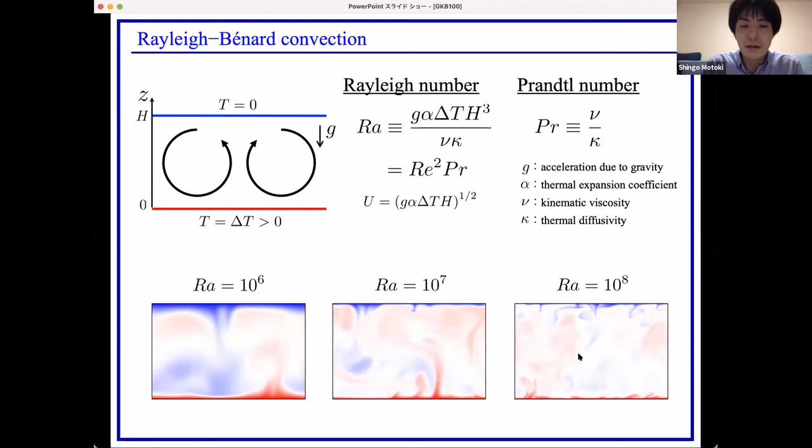Okay, and as Rayleigh number increases, the flow is more complicated, like this, and becomes a turbulent state eventually, representing the multi-scale flow and thermal structures. Okay, so the wall heat flux, corresponding to the total vertical heat flux from the bottom to the top walls, could be quantified by the Nusselt number. And one of the primary interests in the Rayleigh-Bénard problem is scaling laws of the Nusselt number with the Rayleigh number. And over half a century ago, two scaling laws have been predicted and discussed.

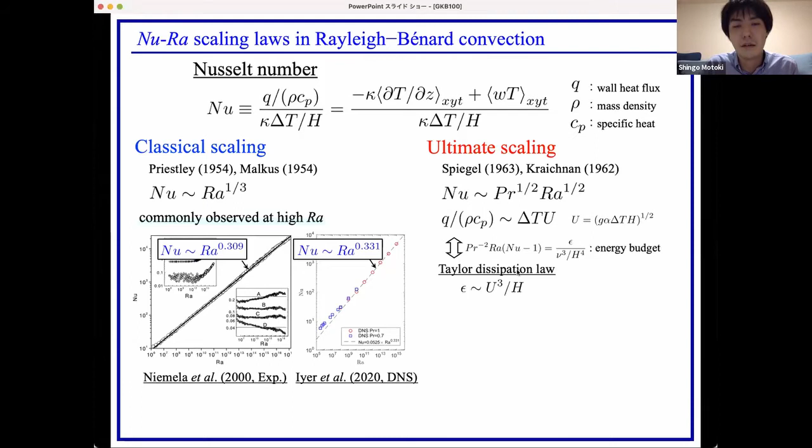One is the 1/3 power law, referred to as classical scaling, and the other is a 1/2 power law, currently called the ultimate scaling. The classical scalings have been commonly observed at high Rayleigh number in a lot of experiments and numerical simulations like this. On the other hand, the ultimate scaling means that the wall heat flux is independent of the thermal diffusivity like this. So this is related with Taylor's energy dissipation law via the energy budget of thermal convection. So Taylor's energy dissipation law implies that the energy dissipation rate is independent of the kinematic viscosity of the fluid.

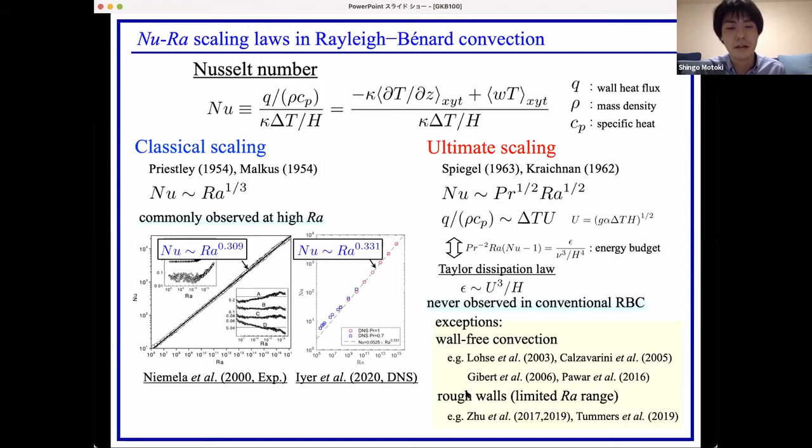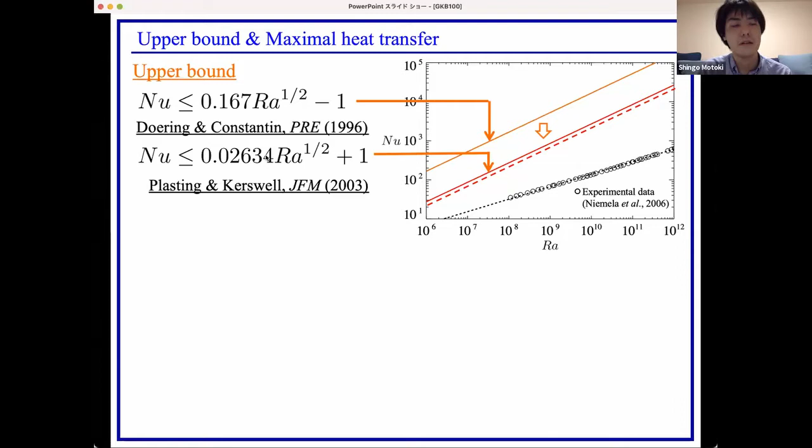But the ultimate scalings have never been observed in conventional Rayleigh-Bénard convection, except in, for instance, a wall-free convection or thermal convection between rough walls. Okay? For the Rayleigh-Bénard problem, the rigorous upper bounds have been derived by using a variational method. And Doering and Constantin first derived these upper bounds, and then the lowest asymptotic upper bound was obtained by Plasting and Kerswell. And these upper bounds exhibit the ultimate scaling like this.

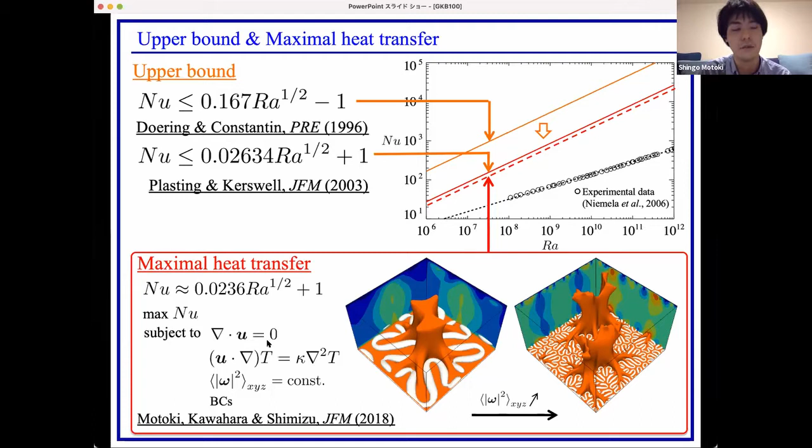On the other hand, we have recently found the optimal states maximizing the heat transfer under the constraint of the total enstrophy. And this optimal state also exhibits the ultimate scaling, and this ultimate scaling is quite close to the lowest upper bound here. However, the maximal heat transfer state does not satisfy the full Boussinesq equations, that is, the Navier-Stokes equation with buoyancy force. So these solutions require an additional body force other than the buoyancy force.

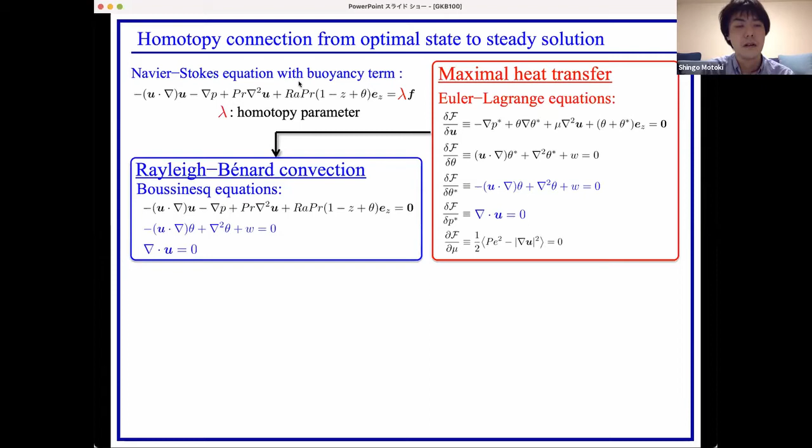Then we tried to connect these optimal solutions of the Euler-Lagrange equations for the maximal heat transfer problem to the steady solutions of the Boussinesq equations for the Rayleigh-Bénard problem using homotopy continuation from the body force to the buoyancy force. As you can see, the three-dimensional optimal states could be continuously connected to the three-dimensional steady solutions of the Boussinesq equations. This lambda equal to 0 represents the Boussinesq system here. And in this study, we focused on these three-dimensional steady solutions.

Okay, so we consider the solution to the Boussinesq equations with the following boundary conditions: no-slip, impermeable, and constant temperature difference between the walls, and horizontally periodic conditions. And we have tracked the three-dimensional steady solutions up to high Rayleigh number using a Newton-Krylov iteration.

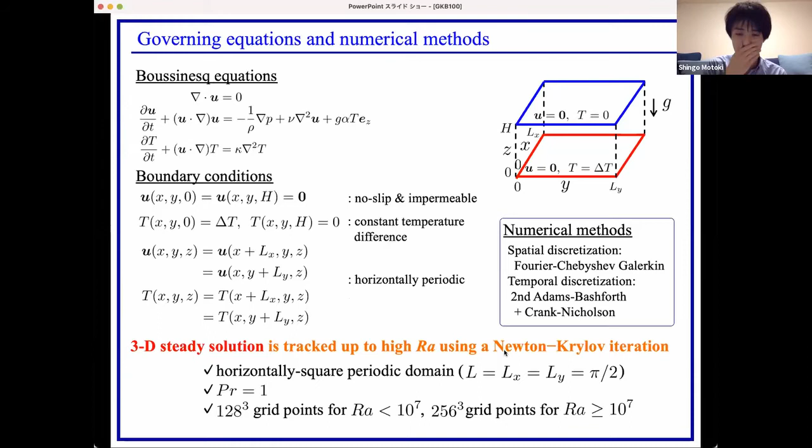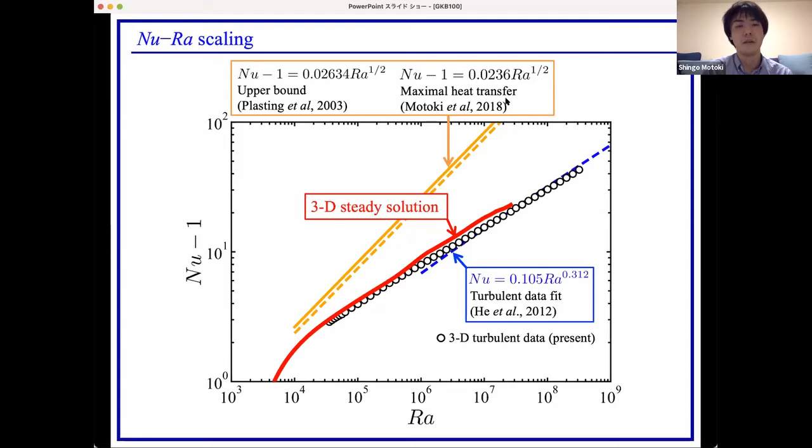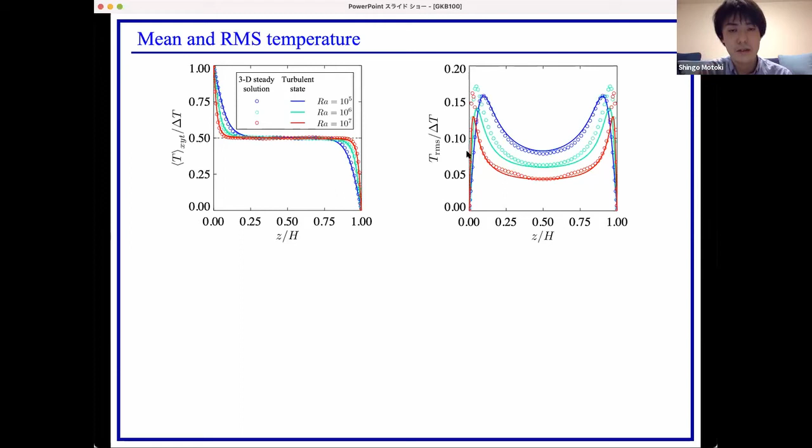Okay, so this is the mean temperature profiles and root mean square temperature in the three-dimensional steady solutions and turbulent state. The mean temperature profiles in the three-dimensional steady solutions follow that in the turbulent state well, like this. Furthermore, the corresponding RMS values are in good agreement with each other.

Okay, let's normalize the distance to the wall Z by the thermal conduction layer thickness delta. Near the wall, all normalized temperature profiles collapse onto a single curve. So the temperature difference exists only in the thermal conduction layer. On the other hand, the RMS temperature exhibits peaks at thickness delta.

Okay, so we consider the physical mechanisms of classical scaling. Here we assume that the Prandtl number is of order unity. In the near-wall regions corresponding to the thermal conduction layer, in the vertical component of the Navier-Stokes equations, advection, viscous and buoyancy terms can be comparable with each other. This balance determines the length scale and velocity scale as follows.

And this is the RMS vertical velocity normalized by this velocity scale. We can confirm the vertical velocity fluctuation scales with this velocity scale. So the definition of the thermal conduction layer thickness here and this length scale suggest the classical scaling.

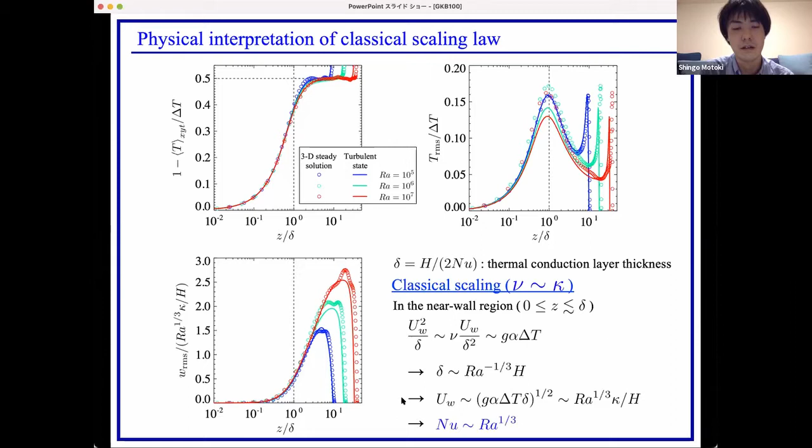Okay, so let's look into the spatial structure of thermal convection. These figures show the thermal and flow structures in the three-dimensional steady solution and the turbulent state at high Rayleigh number, 10 to the 7 here. The yellow objects represent the isosurface of temperature, representing the high temperature plumes. The gray objects represent the smallest scale vortex structures, visualized by the second invariant of the velocity gradient tensor.

Near the wall, we can observe sheet-like small-scale thermal plume structures with smallest scale vortex structures like this. These smallest scale structures are quite similar to those observed in the snapshot of the turbulent state. These small scale structures appear in the conduction layer, and the size of the thermal structures and the vortex structures scale with thickness delta in both the three-dimensional steady solutions and the turbulent state. So the three-dimensional steady solutions reproduce the near-wall convective coherent structures in the turbulent state.

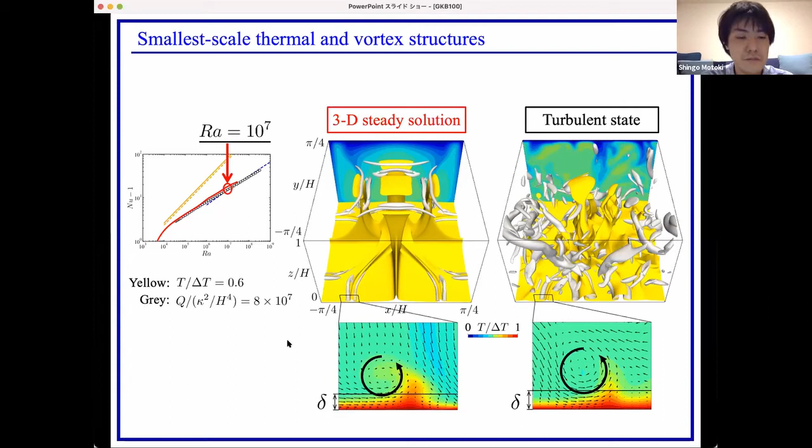But what then of the bulk flow? To examine the hierarchy of multi-scale vortices in the three-dimensional steady solutions, we apply coarse graining to the velocity field. The coarse-grained velocity U star is obtained by using a Gaussian low-pass filter, and here sigma represents the filter width. This method has recently been employed to capture the coherent structures of wall turbulence.

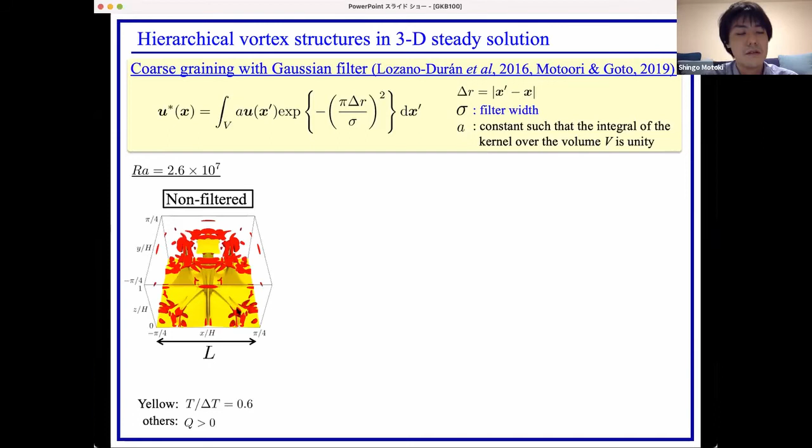So this is the non-filtered structures, and the red ones represent the smallest scale vortex structures. These blue objects represent the largest scale structures corresponding to the large scale circulation. These structures are visualized by the positive Q of the filtered velocity with sigma set to H. And for sigma set to L over 4, L over 8, L over 16 and L over 32, we can extract different scale vortical structures like this.

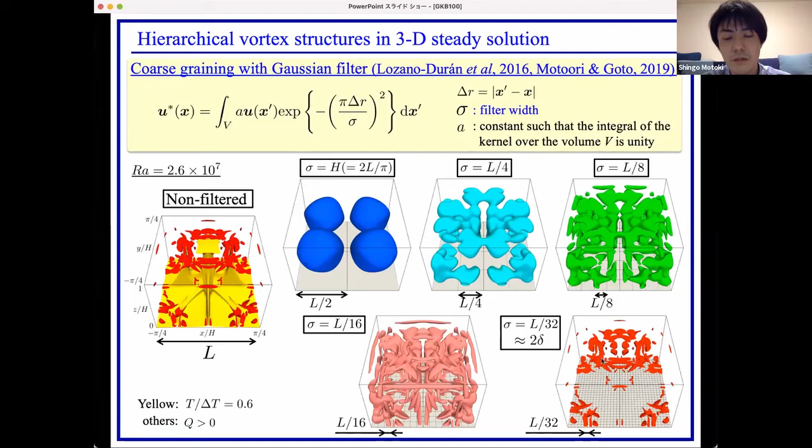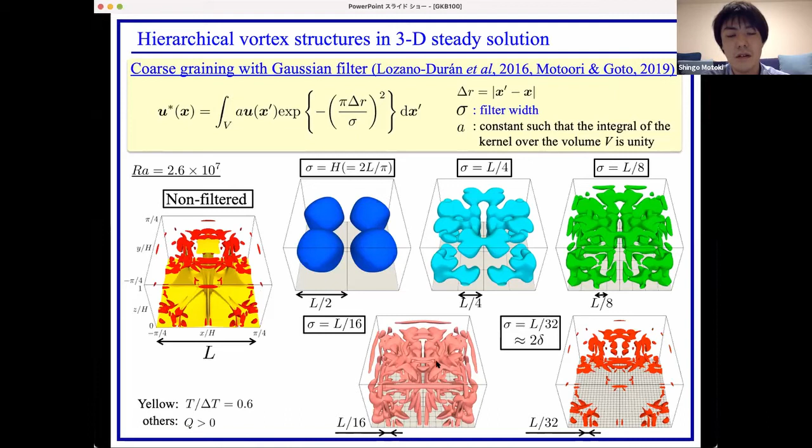The red structure represents the smallest scale structures, consistent with the non-filtered structure, and L over 32 corresponds to twice the thermal boundary layer thickness. The light blue objects and the green and the light red ones represent the intermediate scale structures, and we can observe these intermediate structures in the bulk region.

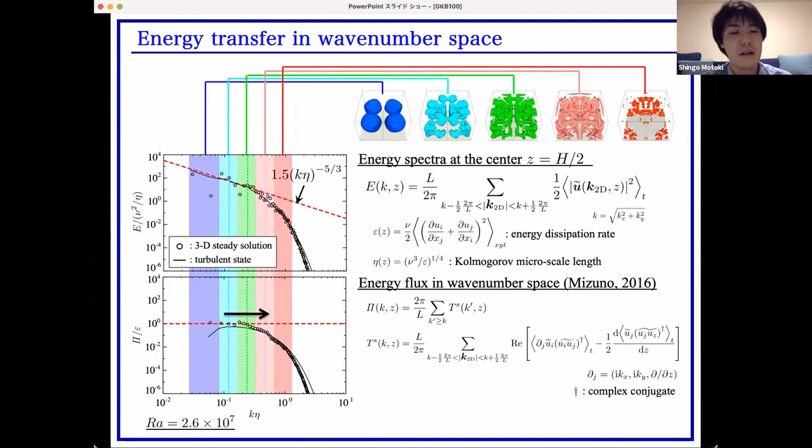Therefore, the three-dimensional steady-state solutions reproduce convective turbulence in the bulk region. Okay, let's get back to our original topic, that is, the scaling laws in thermal convection. So in short, in the conventional Rayleigh-Bénard configuration, that is, divergence-free velocity between isothermal, no-slip, impermeable and smooth walls, the maximal heat transfer state can achieve the ultimate scaling. However, the optimal state requires an external body force other than buoyancy.

On the other hand, the three-dimensional steady-state solutions and the turbulent states, of course, satisfy the full Boussinesq equations, but they exhibit the classical scaling. So our next question is: is ultimate scaling achievable in wall-bounded buoyancy-driven convection? In response to this simple, naive question, we have focused on the impermeable condition on the wall.

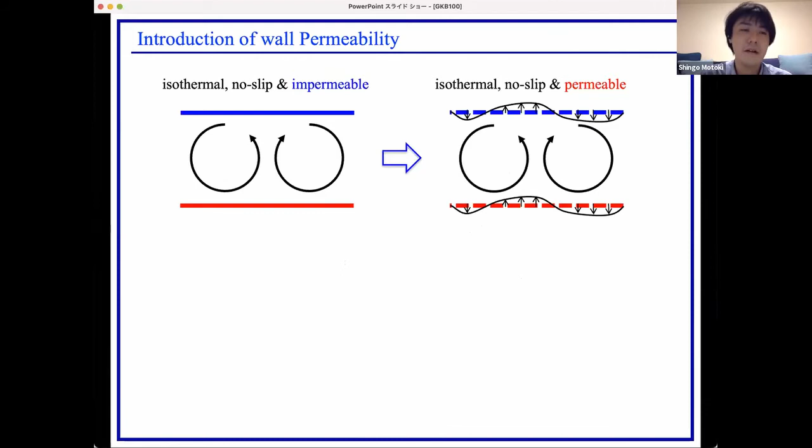So we have introduced wall permeability while keeping the isothermal and no-slip conditions. These boundary conditions can be realized by a permeable wall. This permeable condition is a simple model mimicking a porous wall with a constant-pressure plenum chamber underneath, like this. On the permeable wall, the wall-normal velocity is assumed to be proportional to the local pressure fluctuation. Here beta represents the permeability parameter. For beta equal to 0, the impermeable condition is recovered. On the other hand, beta equal to infinity implies wall-free convection.

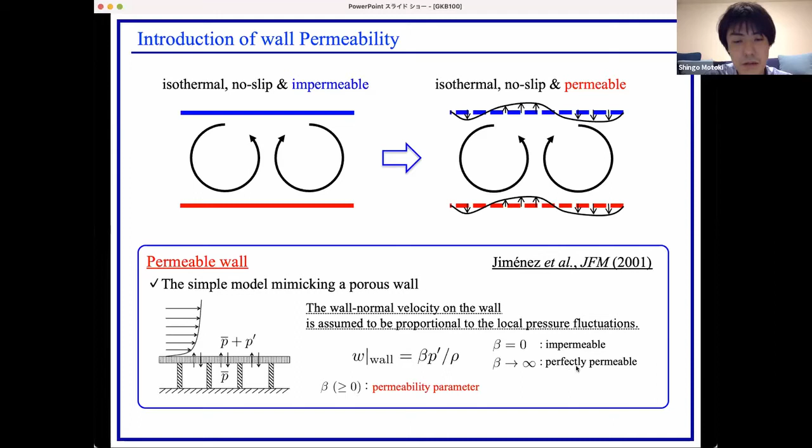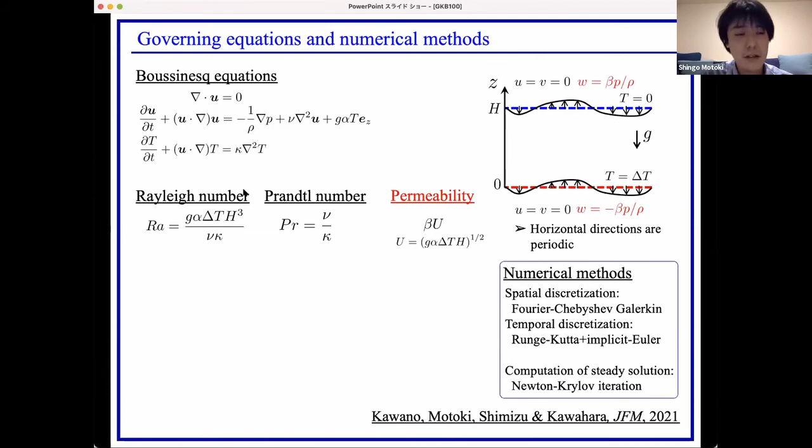Okay. So the governing equations are the same as in the conventional Rayleigh-Bénard system, with no additional body force and no internal heating. This thermal convection is characterized by the Rayleigh number, Prandtl number, and wall permeability. The total energy budget has two additional terms, here and here. This term represents pressure power on the permeable walls. This term is strictly greater than zero, so it is always an energy sink.

On the other hand, this term represents outflow energy across the permeable walls, and this term's sign cannot be specified. However, we have numerically confirmed this term is positive in our computation. So please note that this thermal convection between permeable walls is sustained only by buoyancy power, without any additional energy inputs. Finally, we will briefly introduce steady solutions and the turbulent state in this system.

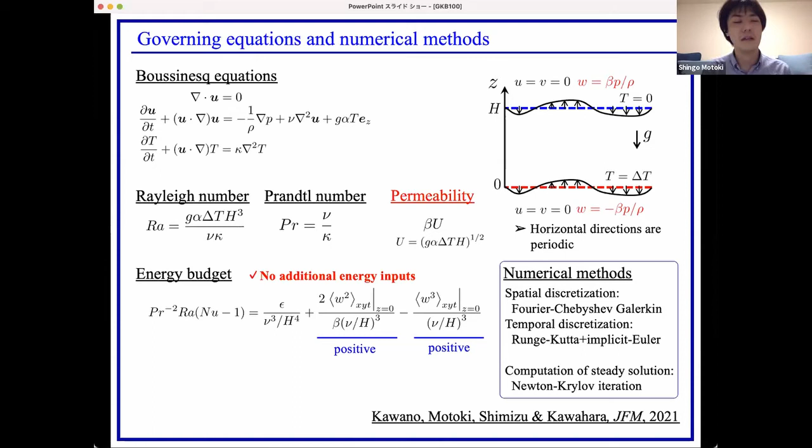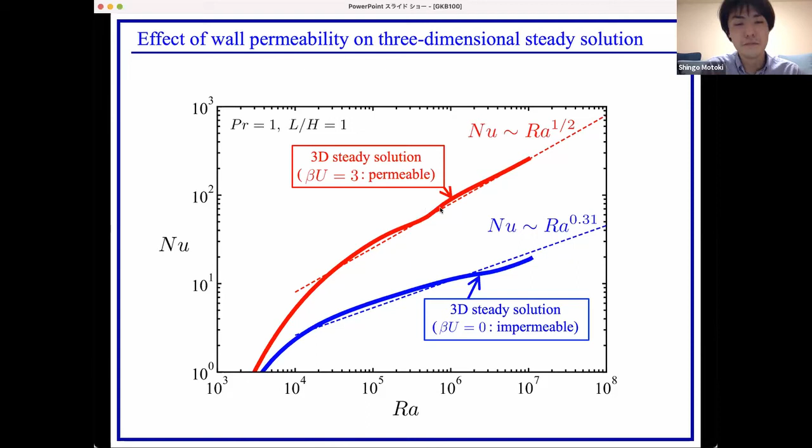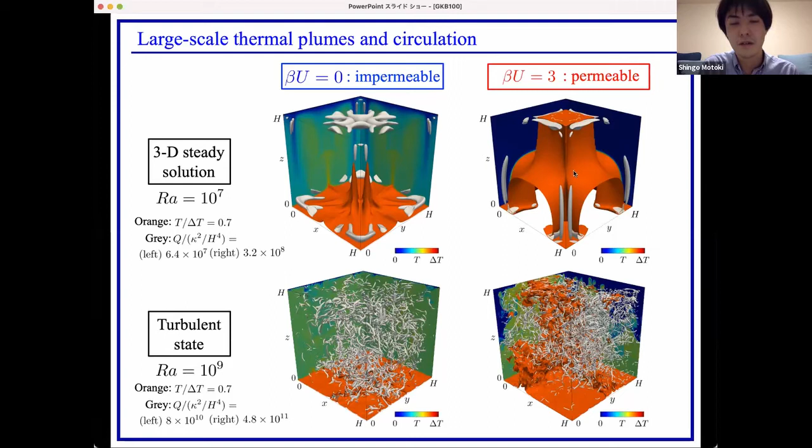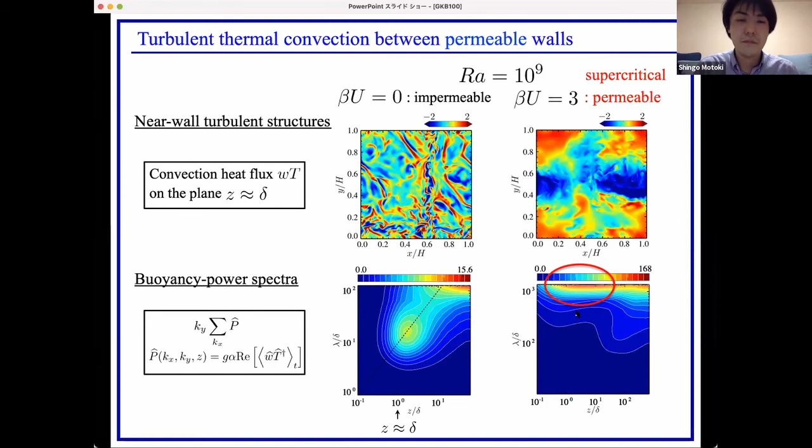Okay, so even in the permeable case, the isothermal temperature condition holds, so the thermal boundary layer exists on the permeable walls, like this. On the other hand, a vertical transpiration velocity is induced on the permeable walls.

But please note that the RMS vertical velocity is not suppressed near the walls due to the presence of the wall. And RMS vertical velocity on the permeable walls scales with capital U, the buoyancy-induced velocity, in the supercritical region, where the ultimate scaling is achieved.

And in the subcritical case, in the classical scaling case, the RMS temperature in the bulk regions decreases relative to delta T as Rayleigh number increases, like this. On the other hand, in the supercritical permeable case, the strong large-scale fluid motion with length scale of order H leads to significant temperature fluctuation in the bulk region. As a result, RMS temperature scales with delta T.

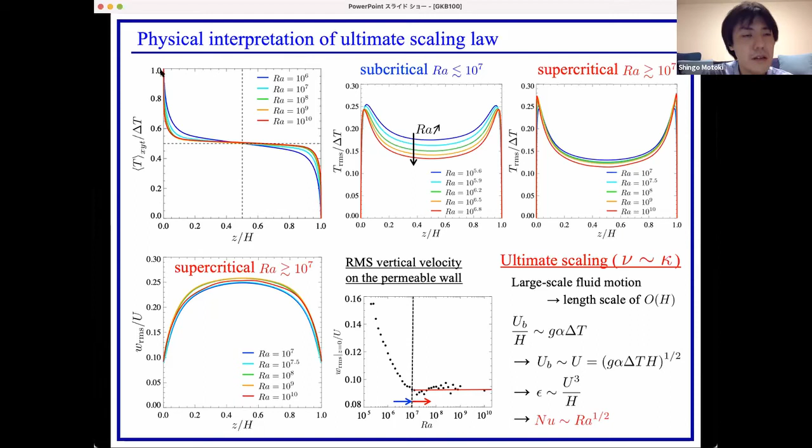Okay, let me summarize my talk. We have found that three-dimensional steady solutions to the Boussinesq equations exhibit multi-scale coherent structures, reproducing structural and statistical properties of convective turbulence. And this exact coherent thermal convection represents classical scaling between impermeable walls and ultimate scaling between permeable walls. Classical scaling is attributed to the vertical velocity fluctuation of this velocity scale corresponding to the small-scale thermal plumes in the thermal conduction layer.

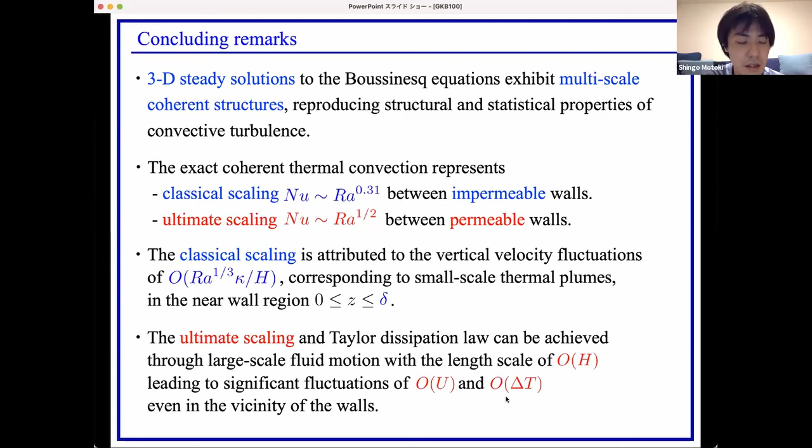On the other hand, the ultimate scaling and Taylor energy dissipation law can be achieved through large-scale fluid motion with the length scale of H, leading to significant velocity and temperature fluctuations of order U and delta T, even in the vicinity of the wall. Okay, that's all. Thank you for your attention.

Thanks very much for this very interesting talk on Rayleigh-Bénard convection. So are there any questions?

So this transition between the regular scaling and the ultimate scaling is observed here through the change in the permeable boundary condition. And recently, in the team of Basile Gallet, they also found the ultimate scaling, but with internal heating, which also included maybe a change of boundary conditions. Do you think those works are related somehow?

In the classical scaling regions, the transpiration velocity is weak, and in the ultimate scaling regions, this particular transpiration velocity is enhanced in the vicinity of the wall. So inducing these transpiration velocities leads to the ultimate scaling, and in the classical scaling regions, this transpiration velocity is weak, and so the internal heating case. Yeah, so on the permeable walls, excuse me.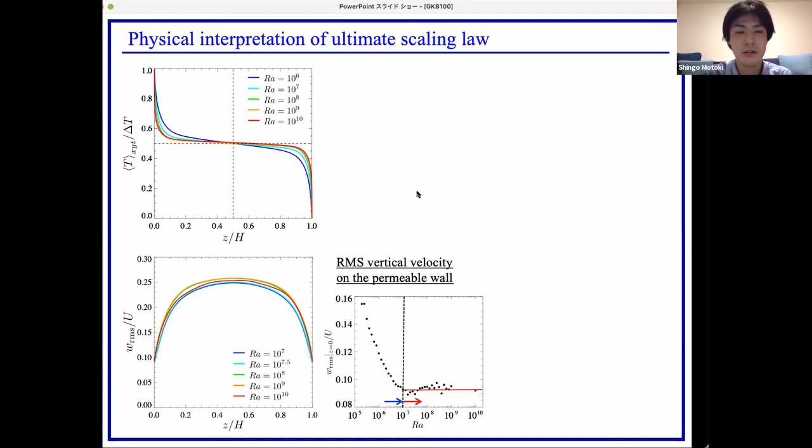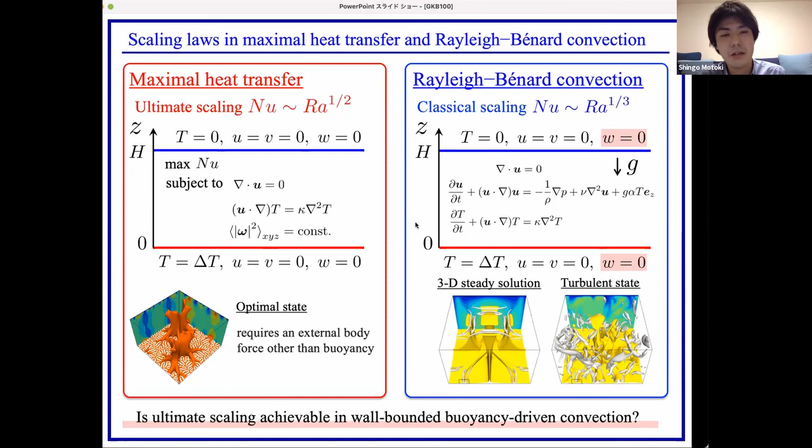So in the rough wall case, the ultimate scaling can be obtained, but in the roughness case, the ultimate scaling is achieved only in limited Rayleigh number regions, where the roughness element size is comparable with the thermal boundary layer thickness. On the other hand, in our permeable case, ultimate scaling is attributed to the transpiration velocity on the permeable walls. So this ultimate scaling is not limited; it is sustained at higher Rayleigh numbers. We believe that. So this is the difference.